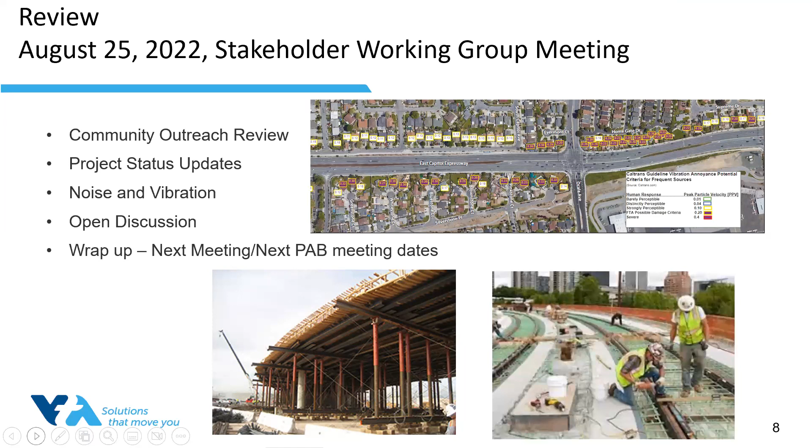I think it sounds like you're going to dive into some changes around the Ocala station later in the agenda. I'm going to address it. It's not changing, but I will address that. Okay, sounds good. Thank you. No problem. And maybe Huascar, there's a long history there, and I can always meet with you separately too, just to catch you up on a lot of that. Totally, absolutely. Whatever's helpful for the entire group.

In January, we held 2 community meetings to introduce the artists that have been selected for the new stations. We introduced Laura Haddad and Tom Drugan. They're an artist team, and they are going to be enhancing the Eastridge station with art. Amir Fallah is the artist that was selected for the Story Road station.

We held 2 meetings actually. The meeting on January 9th was facilitated in English by myself and Mary Rubin, and it had Spanish and Vietnamese interpreters. The meeting on the 11th was facilitated in Spanish. I think everyone used the English channel on that one. I think a couple of people stayed with our facilitator.

We're going to repeat that again for the next art concept meetings. The purpose of those meetings was to introduce the artist and share examples of past work they've produced for other public commissions. What was more important was for artists to get to know you, the community, and learn about you. These meetings have been recorded and are available for your review, along with a copy of the presentation.

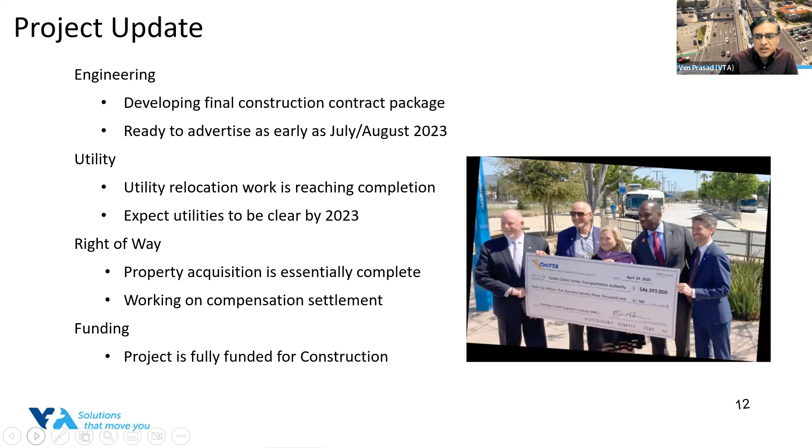These are some of the photos we took during the underground construction. You may have noticed if you had driven by the Capitol Expressway, these are all the underground PG&E work that happened a few months ago. These are what we call vaults, concrete big boxes where the conduits would come in,

and PG&E would relocate and replace the old cables with new ones. You see here the yellow conduit or pipe is for the gas relocation that we did. So like I said, these are all the ones that were in the footprint of the project, and they've all been moved out so we can build the project in the middle of the expressway.

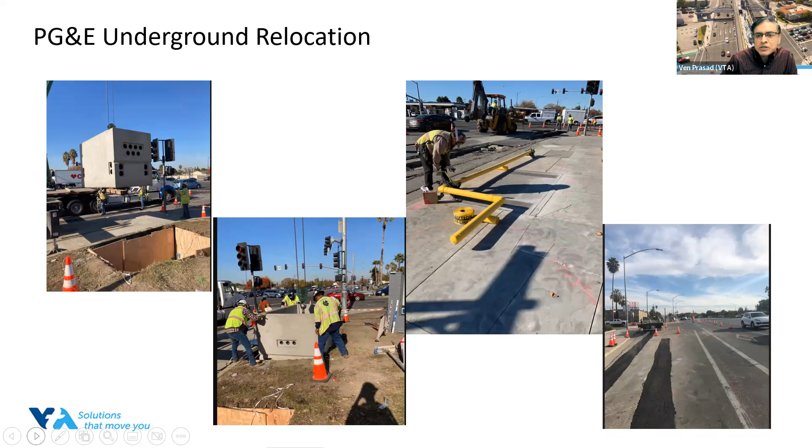Next slide, please. I wanted to give you a photo simulation of how the bridge is built, so you have a good understanding as we go forward with how the project itself will be constructed. I want this group to understand, as we go along during construction, how each part of the bridge construction is built.

On the left side is how the bridge is going to look at the median of Capitol Expressway. It's kind of a cross section - we've cut across the expressway, and at the bottom is the foundation. You see those 6 vertical ones - they are called piles. These piles are driven into the ground, and these are the ones supporting the column and the bridge.

We have what's called the column, and once the column is constructed, the superstructure or box girder bridge - we call it a box girder because you can see those 3 boxes built. These are all built in several stages. This is construction that's going to happen over a period of

4.5 years. The pile driving itself is roughly about 9 months of work. It's going to be at several locations, not just one place. So as we start from one end to the other, we'll have 2 crews working from both ends so we can finish the project as soon as possible.

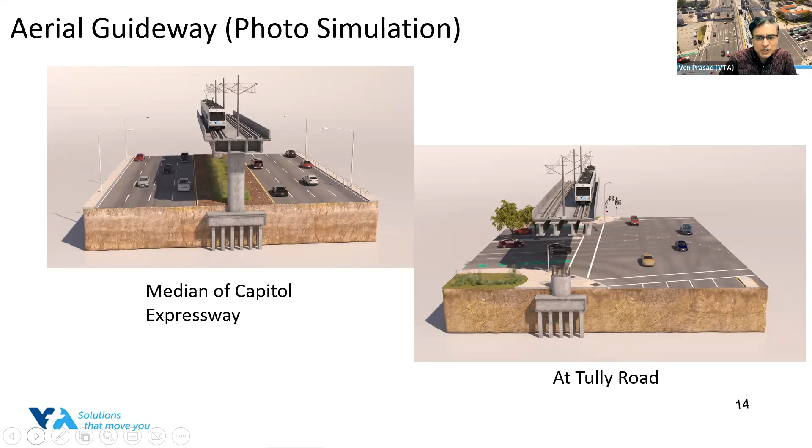The wiring you see on top, the poles and the wiring, those are part of the electrification system for the train. You may have noticed it along the light rail line, that these poles and electric wires support electrifying the train. We call it the catenary system or overhead catenary system. We'll hear this terminology as we go forward in construction, as we give you regular updates on the project.

I want to go to the next slide and give you how we are planning to execute this project. We are building this project in stages. We have several stages of construction. The very first stage is when we want to widen the outside of the expressway so that we have room in the middle to build the project.

What you see as roadway widening is where we're adding more pavement to the outside so that we can shift the traffic, the lanes of traffic we have right now, to the right side, so that we make room in the middle for us to construct the project.

One of the things we would do in the very first stage is driving some piles at several locations. This is what's called a pile testing program, where we collect data from the pile driving, like the noise and vibration, and soil testing - the soil resistance that the pile is providing - so that we can design the piles and go forward with carrying the piles for several locations at foundation.

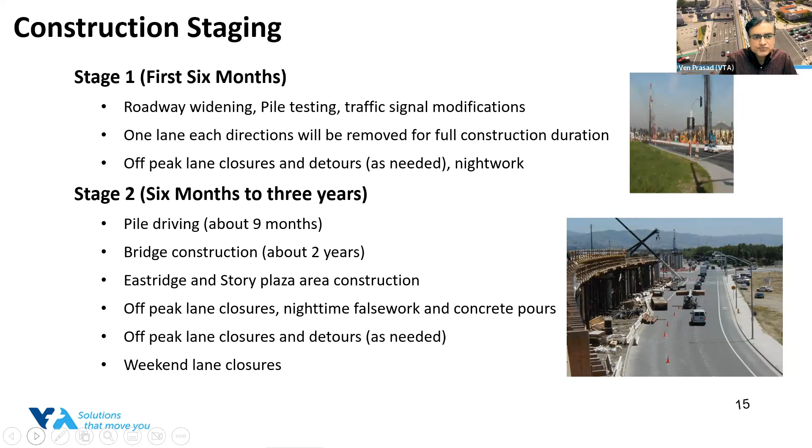Stage 3 of the construction will be in the 4th year of the project. This is where we'll complete the Eastridge and the Story stations. Earlier in stage 2, I talked about the beginning of the plaza construction. In this stage, we'll be completing at story. We have 3 elevator structures that'll be complete, as you can see in the right photo.

We'll also be installing the tracks and electrification system in this stage. So this is the stage where you see less work at ground level, but more work at the bridge level.

There'll be track installation and installation of poles for the electrification system, or the overhead catenary systems. They'll be working on train signals work. This will also be the stage for the pedestrian overcrossing - this is the steel double arch bridge you see on the right side of the photo that'll be installed, required to connect the stairs and elevator to the platform level.

Then the traffic signal work will be happening - this is at the street level, the final traffic signal locations, and work is going to be happening there. There'll be some drainage and planting work in the 4th year of the project. Just like the previous stages, there'll be lane closures as needed, and some weekend lane closures.

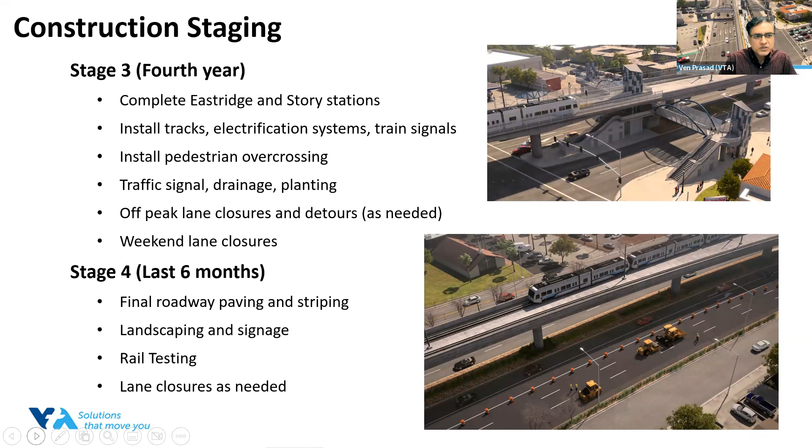So with that, here is one of the simulations. Once the project is complete, you'll see this - this is a simulation of the bridge near Tully Road. As you can see on the left side, it is coming down to the street level at Eastridge.

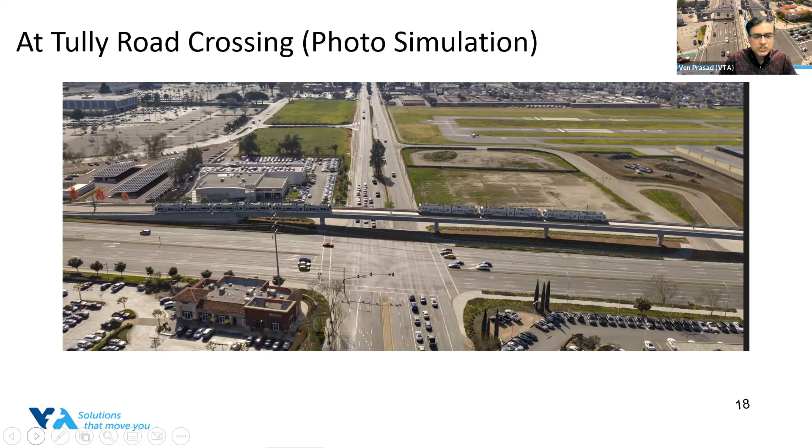Next slide, please. I wanted to give you an overview of where we are on the schedule and funding. As you can see here, the yellow line - we are getting ready, putting the contract package together for July advertisement. We intend to award this contract in December, and the construction will take about 4.5 to about 4 years and 9 months or so, allowing some range for any unforeseen conditions.

Like I said earlier, we have all the funding for this project. It took a long time for us to get all this funded, and we are ready to go. We're very excited to start construction on this project. It has taken a couple of years to get all the money together so we can start construction. With that, I'm happy to take any questions anybody has.

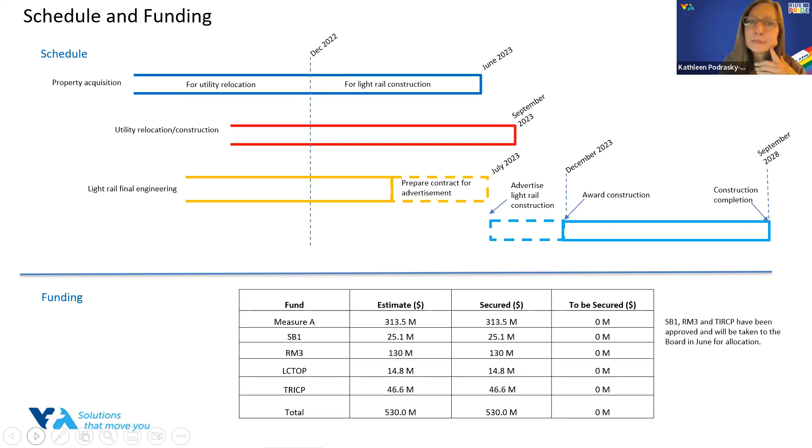Or we'll just go to wrap up. On keeping involved and keeping up to date, I always share our board of directors meetings. We have a board of directors meeting on June 1st, and also the Eastridge to BART Policy Advisory Board. Andreas, I'll come right back to you in just a second.

I did catch we want to keep you engaged on any progress updates with regards to the referral, keep that on your radar. I expect that might be discussed at the June 14th PAB, but while Ben was doing his presentation, I put a reminder on my calendar to email this group that the PAB is meeting on the 14th. I should mention that both our board of directors and PAB meetings are back in person. They also have a hybrid option, and we are physically meeting at the county offices and the chambers over on Hedding.

Okay, so Andre, go ahead. Yeah, it's a question I haven't really asked, but theoretically, when everything is said and done, how quickly would a passenger, a transit user, be able to go from East San Jose to, say, downtown San Francisco?